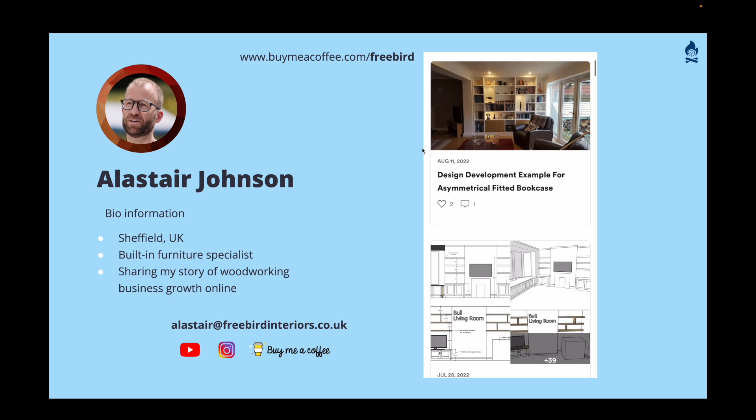The first talk in this series, which was given at Basecamp 2022 in Vancouver, is also available on my YouTube channel. So just search for SketchUp for Cabinet Makers from Concepts to Construction. That video will give you the foundation of understanding about the CabinetSense extension, which we're building on in this session to show the CNC functionality.

To give you some context to the sort of work we do and the environment that we do it in, this is our CNC machine in our workshop. We now have a 2,500 square foot industrial unit. We've moved up from my garage. The CNC machine takes an 8 foot by 4 foot sheet and has 8 tool positions, an 8 tool changer.

What I'm going to show you is very suitable for this sort of machine and any level of machine up from that. It will also be of some interest to you with a more hobby-sized machine, but if you are watching this just considering getting into CNC as a professional, I would very strongly advise that you get a minimum of 8 tool change capacity and a minimum of an 8 foot by 4 foot bed size.

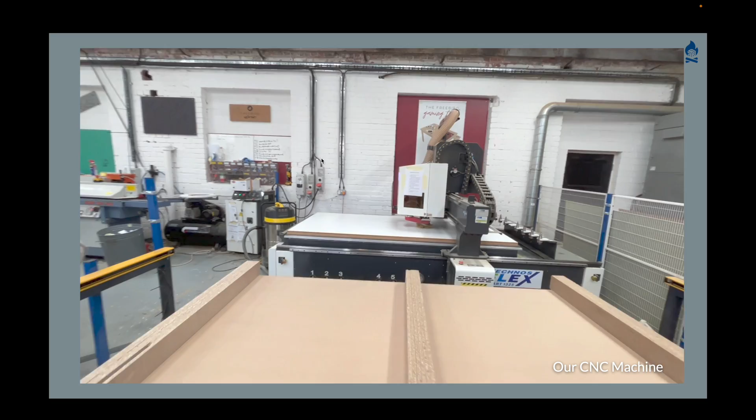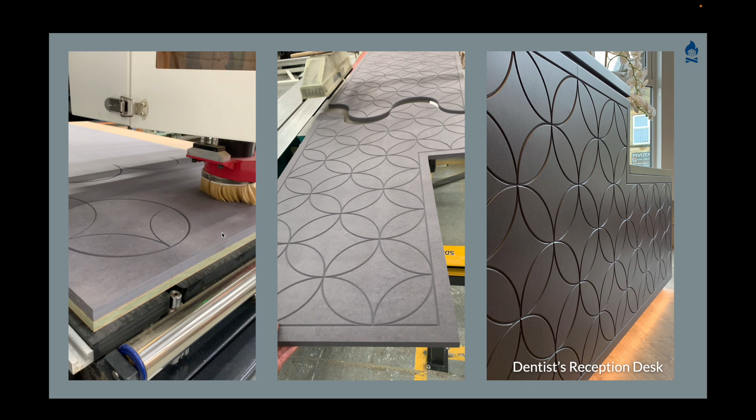Here's an early example of a project we took on after getting the CNC machine. The material here, if you're interested, is a through-coloured MDF. It's the Finsa Fibracolour board. And this particular project was longer than the bed of our CNC machine, but the design allowed us to conceal the joint. And I think this demonstrates very well the possibilities and the precision of CNC manufacturing.

This type of project was planned in SketchUp. The detailing is basically quite unsophisticated, just a series of lines which were toolpathed with a V-cutter. This can be done in SketchUp. Actually, due to curve smoothing issues, I did the final drawing of these curves over in Vectric, which is the other link in the chain of software that we use to get to CNC.

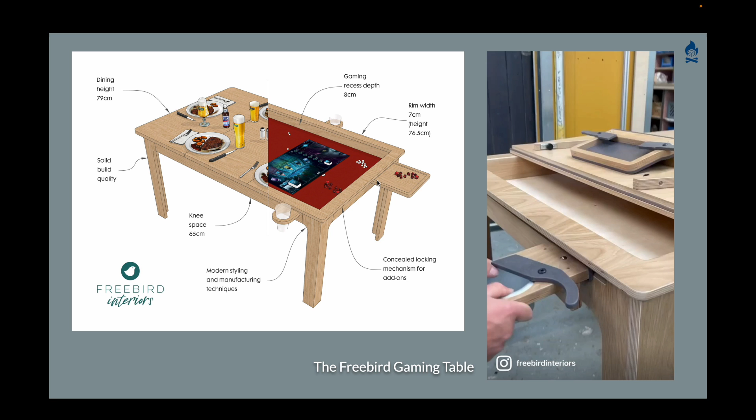Here's a project which was designed entirely in SketchUp, modelled and remodelled after doing prototypes and remakes, checking very, very fine tolerances of these parts and remaking them in SketchUp, and then re-outputting to Vectric. And the way that I produced this 3D model and moved it through to Vectric and CNC is the way that many people are working in SketchUp.

You do your 3D modeling, you actually draw in all your machining and your fixings, then you get that out to Vectric or similar software and apply toolpaths. There is a more efficient way for more standard work, so particularly carcasses, boxes. We can automate this a lot more in the way that I'll be showing you.

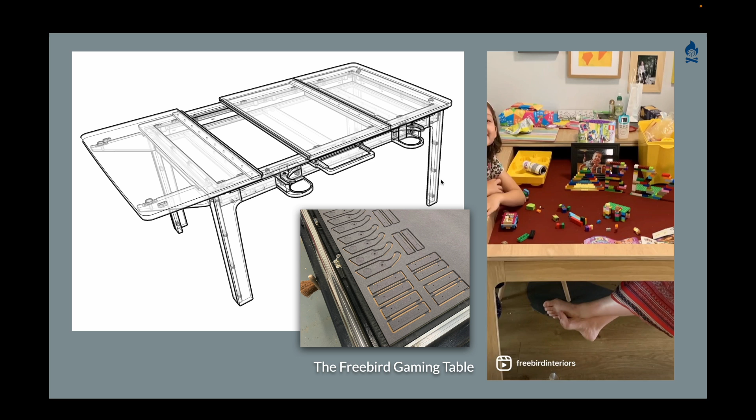Because the reality is that in a built-in furniture business or a kitchen cabinetry business, the bulk of your production is likely to be rectangular parts that need to be cut square and precise. With drilling for shelf pin holes, you need to ideally be churning quite a quantity of these through, know which part is which, and it's not the most inspiring part of your work, so you want it to happen as efficiently as it can. This is really the bedrock of your production.

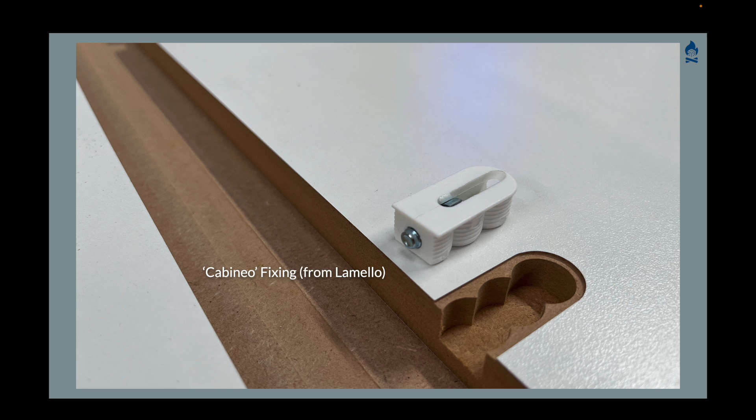And this fixing, the Cabineo from Lamello, is particularly well suited to that because it fits down into the face of the board with a screw that then projects from the edge, but is still very strongly held into the board. And that screw lines up with a 5mm hole in the mating piece, as I'll show you in the next slide.

This shows you a little bit more about how the Cabineo fixing works. Those are your two parts, your 5mm hole. The installer will offer them up. The slight projection of the fixing here will self-locate into the hole before it's pulled nice and tight with this specialised bit. It works a little bit like a pocket hole joint.

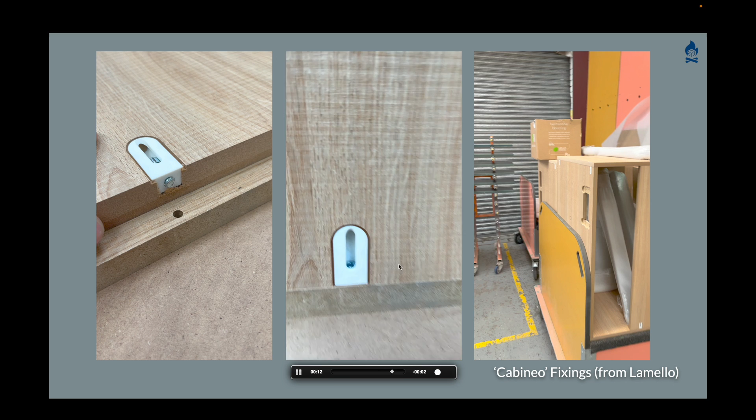So as you can see in these examples of cabinets, we are putting the Cabineos on the outside, out of sight. We're also machining shelf pin holes and hinge holes and cutouts for sockets. Really, as much as we can, we will machine for speed on the CNC machine. So that's a bit of context about what we do, the sort of work that we produce.

For the rest of this presentation, we're going to start with an overview of a specific project in SketchUp and as built, so we can see how we can go from SketchUp to CNC. We'll start by looking then at basic export methods from SketchUp into Vectric for toolpathing and then onto the CNC machine.

I'll then give you an introduction to the CabinetSense extension, and as I said before, there's a bit more detail on that in the previous video, which should be linked below as well. And then we'll look at the CabinetSense export process into Vectric, where you can really supercharge the speed and quantity of information that you're sending through for CNC machining.

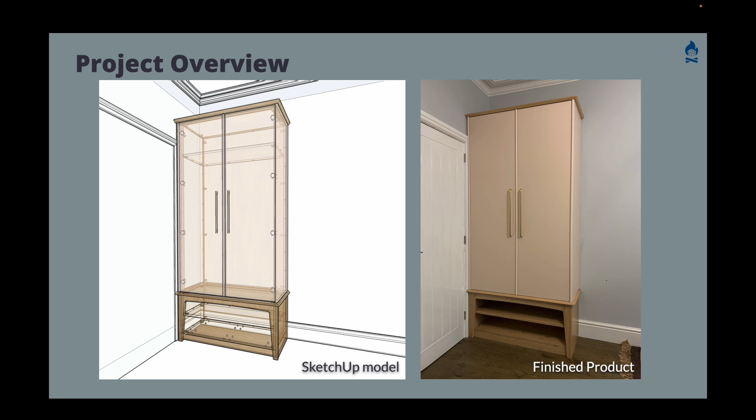Now looking again at the image on the left there, you can see that the machining data, including the hinge cup holes, Cabineo fixings, through screw holes and sockets for adjustable feet, are all there in SketchUp. This data is carried through for CNC machining, but as we'll see, I didn't need to draw any of those circles or cutouts. It was all automated according to rules that have been set up. So let's have a look at the SketchUp model.

So I organise my SketchUp models using a template where I've got preset scenes that allow me to quickly isolate things, and I can add annotations which are unique to scenes.

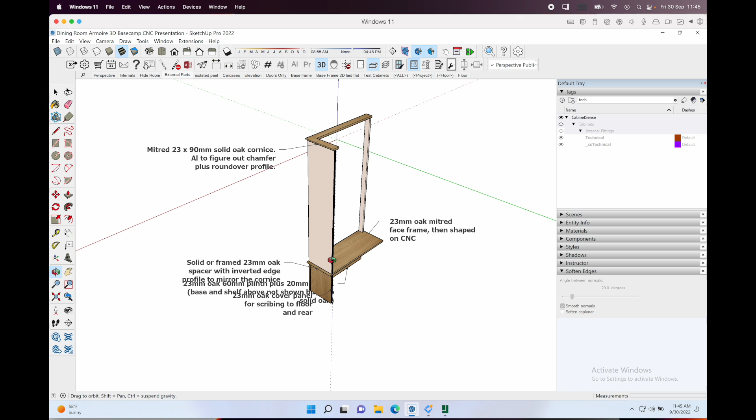There are always some parts on a project that I don't send to CNC because it's quick enough just to instruct my team to measure off the dimensions and go straight to the panel saw. So scribe strips, side cover panels - these don't necessarily have to go to CNC, but they could. Depending on the project, they may be sent through if there are other parts of the same material and thickness that may as well just be cut together.

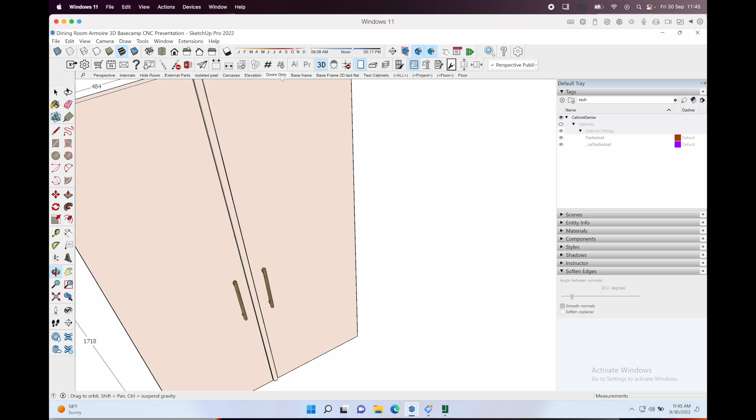Let's have a look first at this shaped base. I've got a scene where I've isolated it, and I want to show you basic methods of export from SketchUp to CNC before we get into the CabinetSense extension.

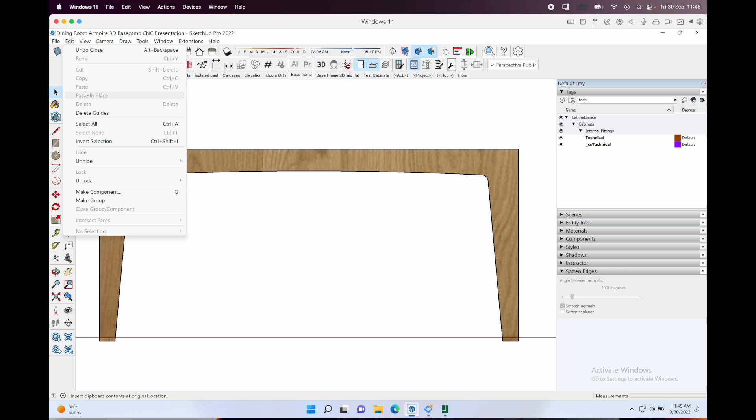You can go right ahead and export, select 2D graphic, and then select DXF. This is a widely compatible CAD drawing format that you can bring straight into Vectric to scale. I've done this already, but I'm just showing the process. So 2D DXF, that's one way of doing it. What you'll get is what you see, and it will come into scale.

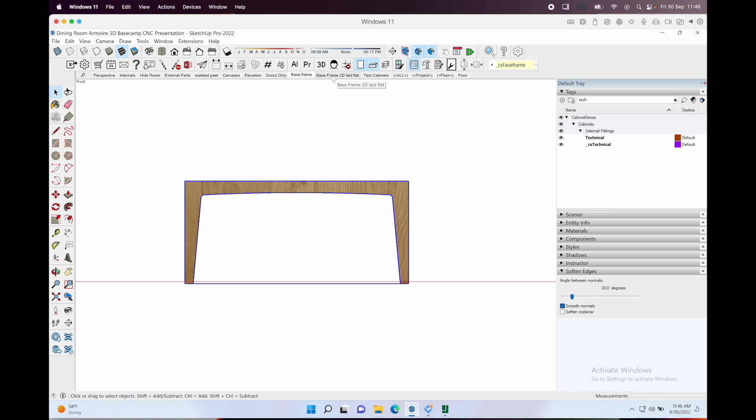Another way of doing it is you can export that part as a 3D DXF, and there are certain benefits to doing that, which we'll see when we come through to Vectric. If you do choose to do that, I found that you need to rotate that part to be laid down flat, so you're looking down on the X and Y axis.

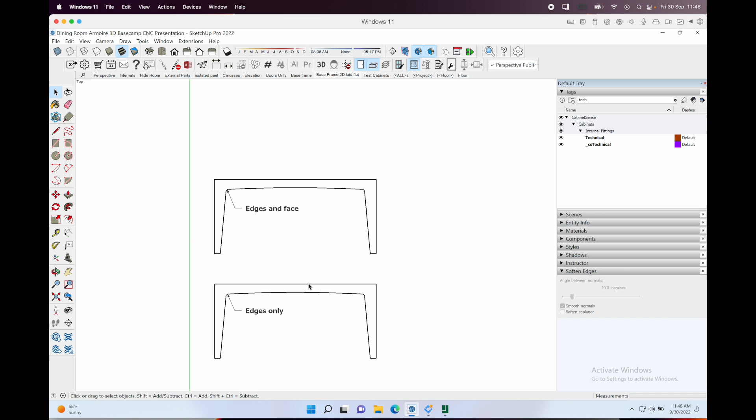So I've done that with this part, and what I've done just to demonstrate something is I've kept a version of it with the face and edges, so you see I can select a face there, and I've got another version of it where I've deleted the face. I've actually converted both of these to just one face without the back edges.

Let's go over to Vectric and explain why I've done that.

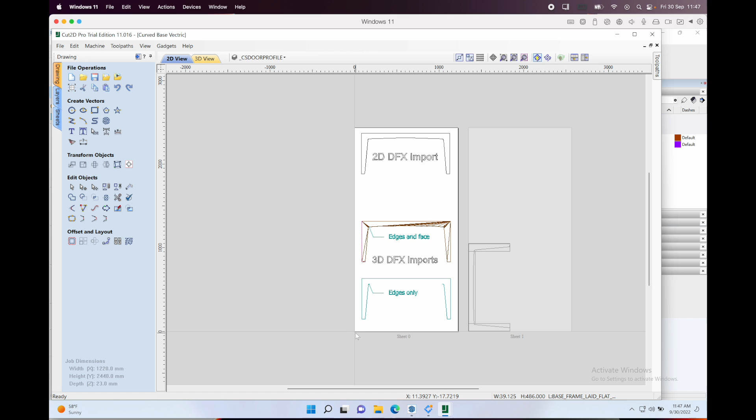So this is Vectric Cut 2D. You can get a free trial of this to give it a go. If you're new to this, what we're working with is a sheet which represents the sheet size that will lay down on the CNC machine. For my machine, the 0 axis is here, x0 and y0. We've already set up the parameters, so the size of the sheet, the thickness, etc.

And we have a lot of tools where we can draw rectangles, etc. directly into Vectric. Over on this side we have the toolpathing, so once we've got geometry drawn or imported, we can start to apply toolpaths, profiles, pockets, drilling, etc.

So I started off by saying that you could bring in a 2D DXF. You'd go to your SketchUp model, you'd go to Export, 2D Graphic, DXF, and then you'd bring it in. The way you'd bring it in would be Import in Vectric here, Import Vectors. You'd find that file. So that came in to scale.

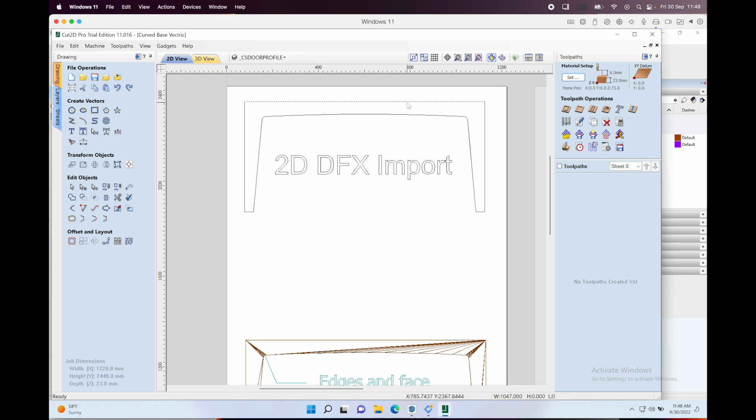But as you probably know with SketchUp, curves are not necessarily true curves. So with that 2D DXF import, you're going to get the faceting of the curve - these are actually straight bits with a little angle that approximate a curve.

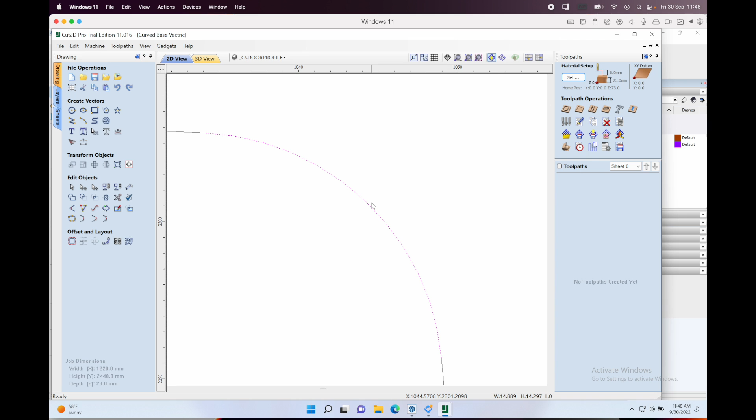The benefit then of bringing in a 3D DXF, for reasons that I don't fully understand, but there's a quirk of the 3D DXF export process where it can identify an arc or a circle created in SketchUp, and it will export it as a true curve, in a way that the 2D DXF export process doesn't seem able to do.

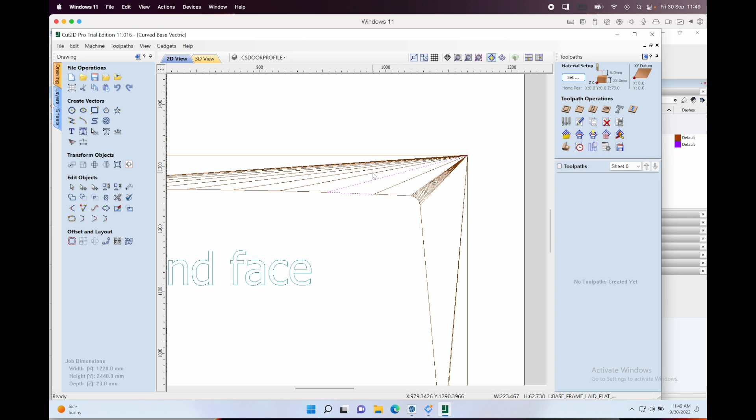However, what we're seeing here is highlighted and dotty. There is the true curve, which it's reinterpreted back to an arc. But we're also seeing the facets, which are the surface. You'll find that when there is a surface or a face in SketchUp on a 3D import, it often is shown with these various connecting lines sat on the face.

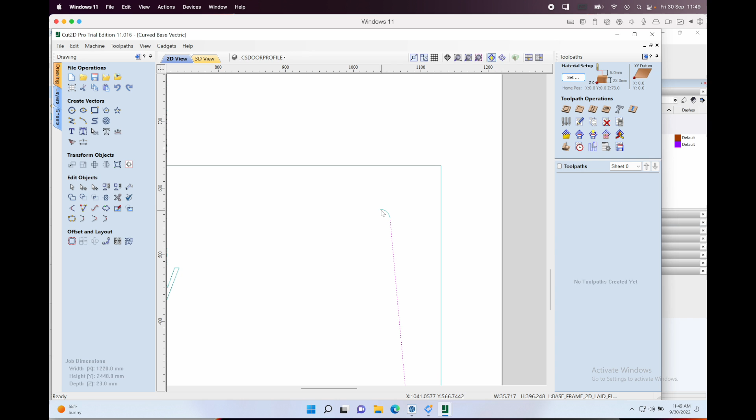So that's the reason why I experimented with stripping back that bit of geometry to just its edges, no faces. But for some reason in the process of doing that, the arc here didn't come through.

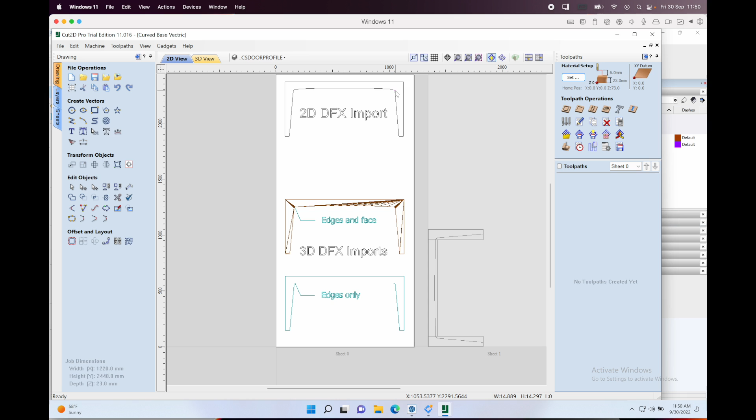So really the purpose of what I'm showing here is that there are certain quirks and limitations to that basic DXF export and import process. It's a bit limiting really for you to have to delete faces or get rid of these kind of lines as they come in. It's also limiting sometimes to have the facets when you want a smooth curve. And note here as well that parts are broken apart, which might affect the ease of toolpathing later.

The other way of going from SketchUp to Vectric is to save your model in SketchUp as the 2019 version. This is because Vectric has an import facility, but it currently only works with the 2019 version of SketchUp, so whatever version you're using, you'll need to save it as that type.

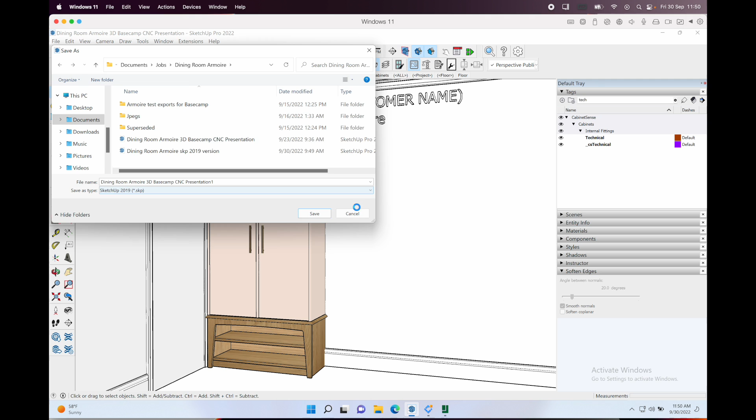Once that's saved, you can come into Vectric and do an import process, selecting the SketchUp model itself. Here's our 2019 version, and a dialog box will come up asking how you want to interpret those 3D groups and components within your SketchUp model, since Vectric needs to decide which face you intend to machine.

Do you want to smooth polygons into arcs, which is a benefit of this Vectric process? Do you want to only import data from certain layers? So you can play around with these settings.

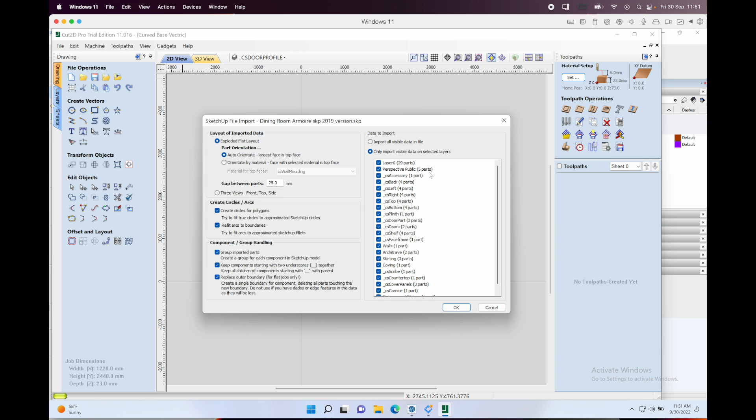Now I've already imported just to save time, so what you'll end up with is it dumping in a bunch of parts with just a rudimentary nesting, laying them along an axis with a certain gap in between. They'll come in according to the layer they're on in SketchUp, so the layers carry through here.

You can set that up to work for you. It will bring in shaped parts like this and have a pretty good go at smoothing those curves, and note that it brings it in as a continuous boundary. You can then nest these and move them around. It's a very useful feature.

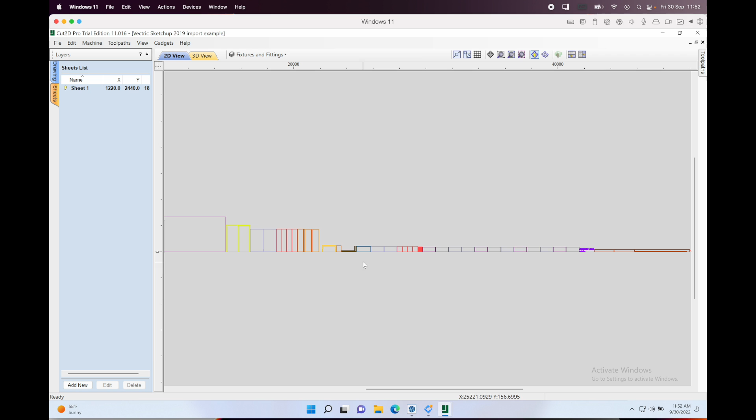However, your parts aren't labelled, so you've got to figure out what's what. Here we've brought in parts of the room, the coving in the room, door frames, text. You can discipline your model so you only bring in the layers you need, but there are still limitations to this process.

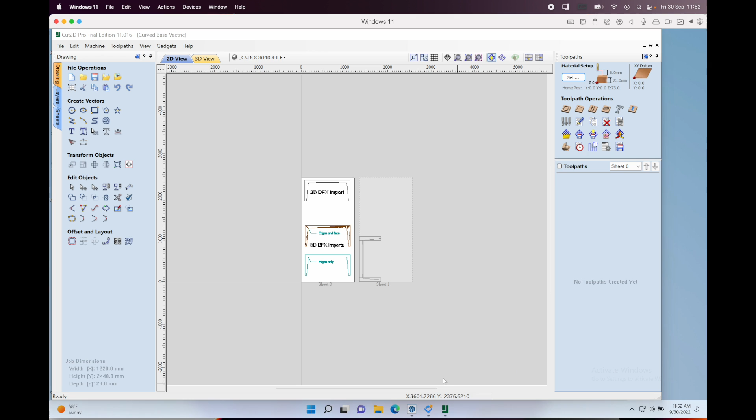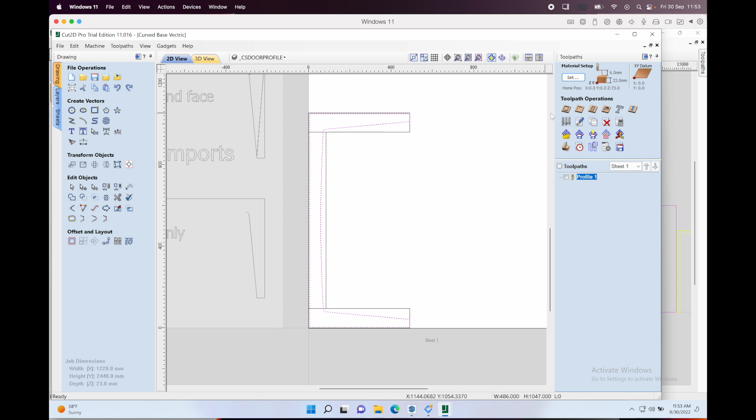Still, let's just assume we've brought our shaped part in by one of those processes just explained. Let's have a little look at how we might machine that. What I did for this part was, within Vectric, I added rectangles oversized versus my finished shape, zeroed down to the zero of my CNC machine, then placed my imported shape on top of it, selected it and toolpathed it with a profile toolpath.

I set my depth plus my standard overcut into the spoil board and selected my cutter, which was a 12mm cutter. In Vectric you can then visualize the machining result you're going to get, just as a little double check that you're cutting right through, and so on. Then you have your toolpath selected and you save your toolpath.

So when you do this, what you'll be saving, if you're using the full version, is Gcode. Gcode is what runs the CNC machine. So let's have a look at how that worked out in real life.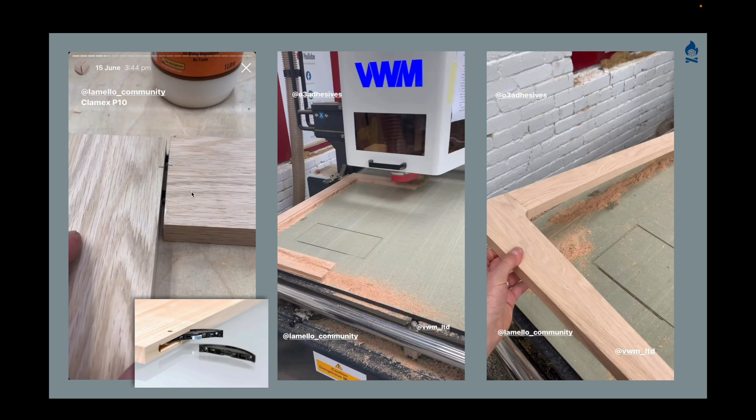What I did was take the sizes I decided on in Vectric for my oak parts, which were just cut using a panel saw and chop saw. I joined them for speed with the Lamello Clamex fitting, which self-clamps, because I wanted to be able to go straight to the CNC.

I secured the workpiece to the base of the CNC with centering pins down at the bottom left, using masking tape on the reverse of the workpiece, masking tape also stuck down on the base of the machine, and super glue in between, which is a good method when your vacuum beds won't hold a thin piece like this. This was the result after I'd taken off the masking tape and cleaned up a little bit.

So that's a great example of what CNC is good for, quickly creating shapes. If you can draw it, you can shape it.

Before we move on to the carcass work, if you're fairly new to CNC, bear in mind that CNC is not the solution for every shaping operation. It can be tempting to try and make it do everything. It won't get rid of the hands finishing aspects you need to do. It won't be the right tool for certain processes like edge shaping. It may be worth investing the time in making it work for a process like that if you're going to do a lot of it.

But very often, for example, the cutting of these joints here, we don't do this in this arrangement often enough for me to have set it all up in an automated way in the CNC machine. It was quickest to go straight in with a handheld Lamello Zeta P2 machine and get those joints done.

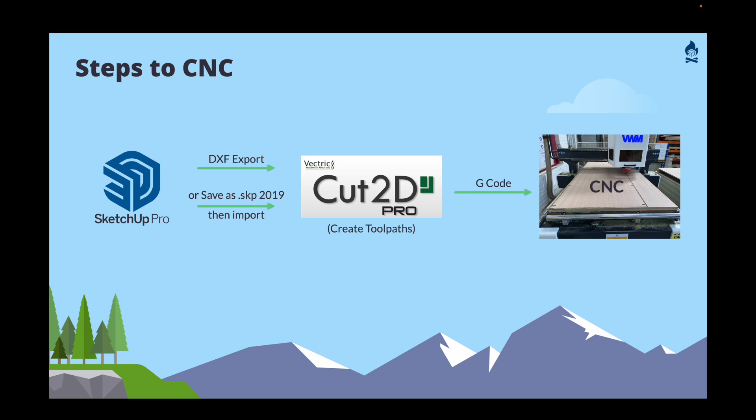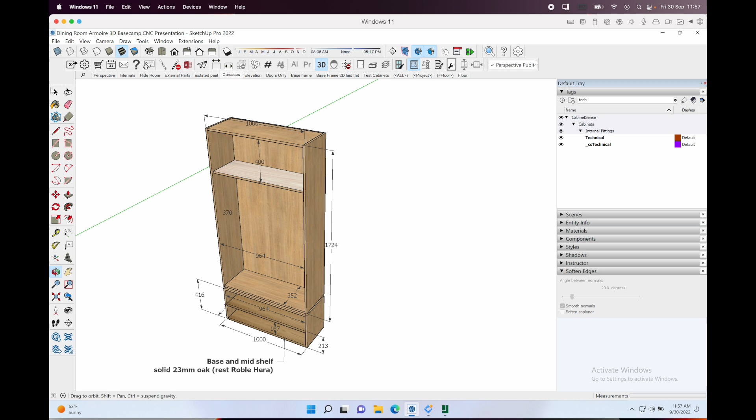So let's look at another faster way of exporting our SketchUp geometry to CNC using the CabinetSense extension. Go back to our original SketchUp model. Now if we just isolate our carcasses here, I'm going to do an X-ray view.

Each part here in this CabinetSense carcass has a lot of options that you can control. Now I get to this window using the CabinetSense toolbar, the CabinetSense's own components option button here. Now this part can have its material independently changed. Let's just change it back to the oak effect melamine. It can have settings like its positioning changed.

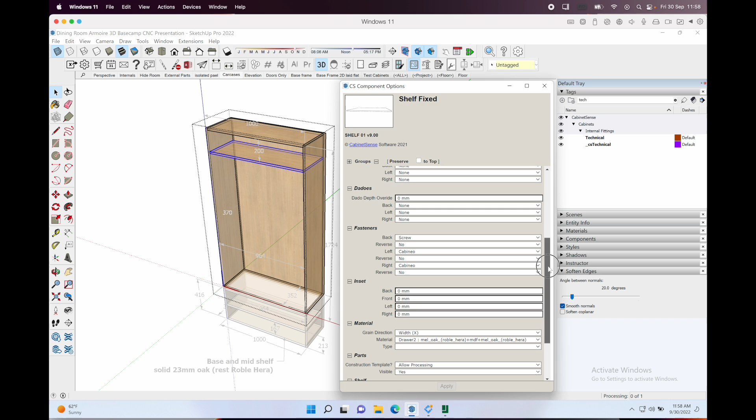I can choose to set the front in. And a range of other settings, including how I want it to be fastened to the adjoining parts. So I can specify that at the left I want a certain type of fastening, at the right a different one, at the back another. So wherever it meets a part, it's looking for an instruction about how it's joined.

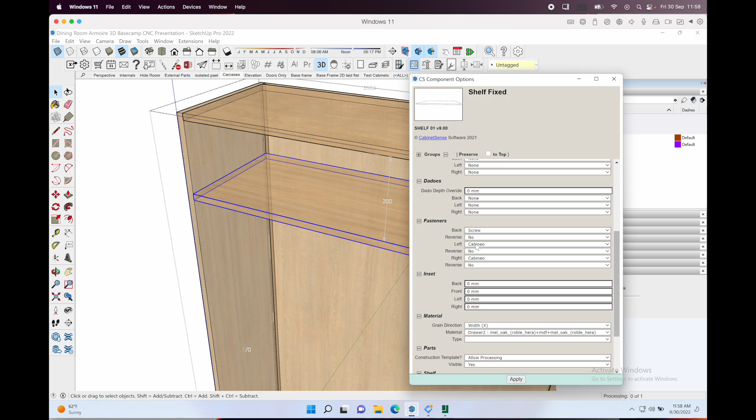So having chosen these, which have been pre-set up in the background in a machining database, I can go out, select my whole cabinet, and then just do a little visualization process, so preview machining drill points. And that's going to show me the machining that's going to be exported in DXF for machining in Vectric. So I can just get a little visual check here that yes, that looks correct.

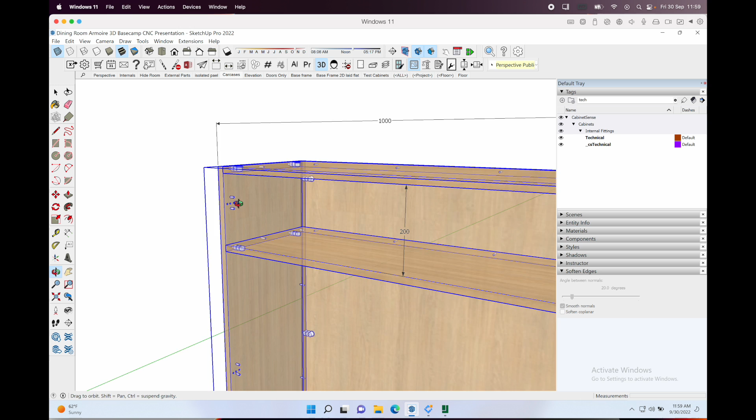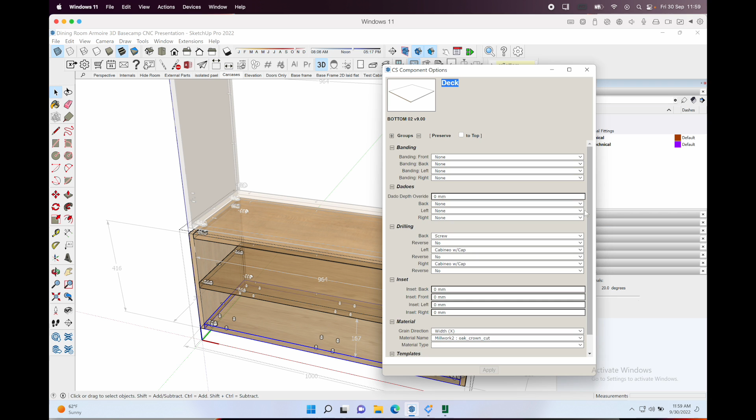The Cabineo is on the underside of the shelf. There's a through hole for a self-tapping screw. We've got my particular machining setup for hinge mounting plates as well. And then down here on the base cabinet, if I just preview that one, again with the machining preview up here, we've even got our socket holes to receive adjustable feet, because that particular part has been set up with that instruction. So our machining template has this type of foot.

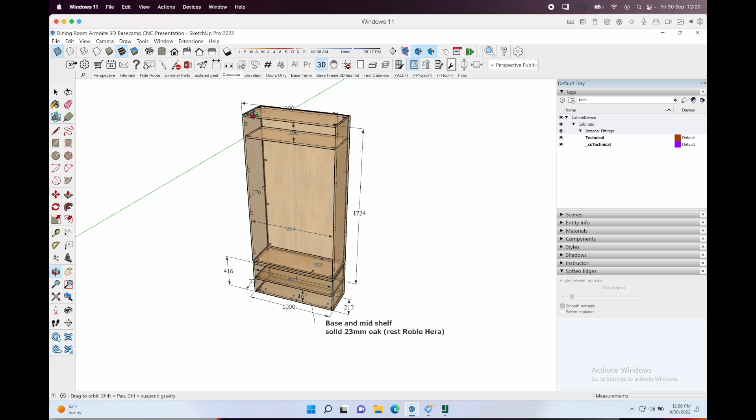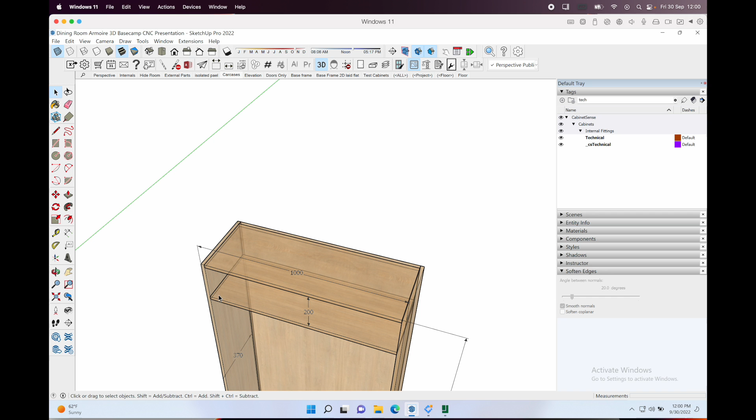Well, how exactly are we going to model that, and how is that going to be picked up in Vectric? Because if I do try to model a recess exactly how I want it to be, then when I export it I may find I get doubled lines and other issues, or overlapping circles which are then no longer identified as a drilling point for my 15mm drill. So it's really much better to not have to draw your machining in.

So the way that it's generated is via a machining database. So CabinetSense comes linked with a Microsoft Access database that it refers to. If we click on the toolbar here, we will open that up.

And this did take me a long time to get my head round, so I'm certainly not going to expect to fully explain it. But let's just give you an overview. If we go to our fastening methods here, I can set up methods, for example, Cabineo, just my 3 overlapping 15mm holes, which is applied under certain conditions. You have Cabineo plus this template, then we're also going to add some foot drilling holes.

If you have a Cabineo for a part that is under this length, then we're going to have a certain set of spacings and different spacings at this length and so on. So as we look over here, what we're instructing is, if this is the conditions we're working with, then we want to have a Cabineo fastener 37mm from the front edge and 57mm from the back edge. And over here I've specified that I want to alternate with a screw fitting,

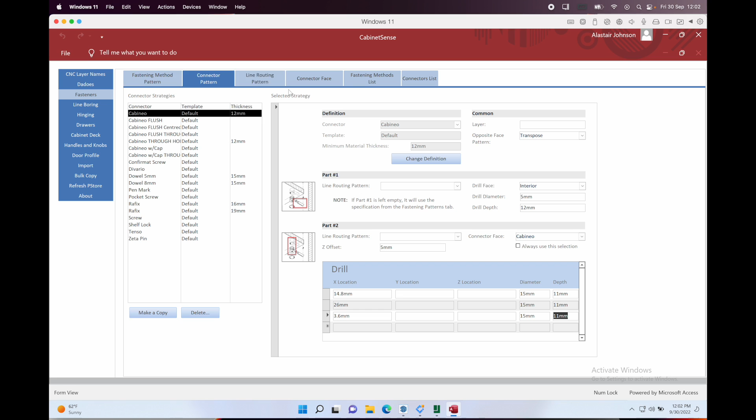that's just a through hole in between the two Cabineos. If we drill down to a deeper level, we've got the actual setting of the Cabineo itself. So we have hole centers here off the edge of the shelf end, or the part end, whichever part it's applied to, the diameter of the hole, and the depth that hole should be drilled at. So these 3 line items here are specifying those 3 overlapping holes. And then simply by choosing Cabineo here, we can choose how that pattern is mapped at the start, end, or center, or a repeating pattern along a connection.

We also set up here the available tools, so that CabinetSense knows what tools we've got loaded in our CNC machine, and then can output the data to suit the tools available. So just before we look at that export process, what we're saying is with CabinetSense, we no longer need to use these basic, slightly error-prone export methods, which leave us with parts in Vectric which we're not quite sure what they are because they're not labelled.

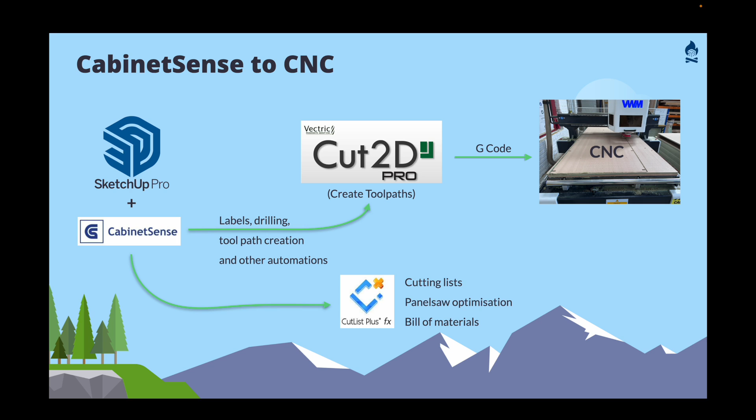We can use the CabinetSense extension in SketchUp, and then we have a direct export process to Vectric, which can include labels, the drilling information we've just described. We can automate the creation of the toolpaths onto that geometry and other automations that are taken care of. You can also use CabinetSense to output your parts to a simple cutting list or nested cutting diagrams for use on the panel saw, and that was demonstrated in the previous presentation.

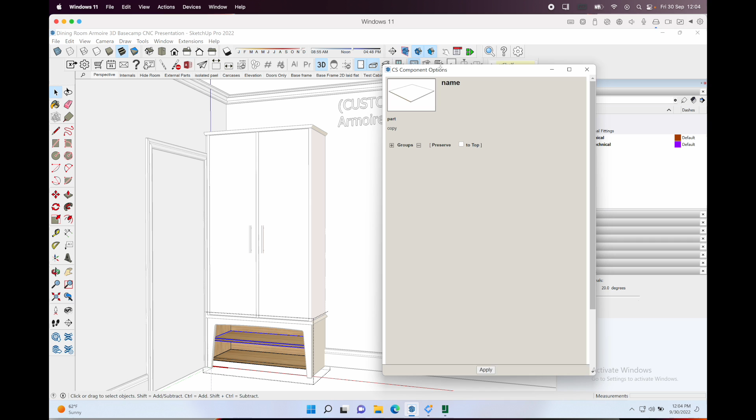So how do we export from CabinetSense? Well, once you've got everything set up and that machining data is applied to each part as it should be, you can just double check per part. See, we've got fasteners applied here. Of course, we can double check with our X-ray view and the preview machining as we looked at. You don't need the preview machining to be on when you do your export, and it doesn't matter really which view you're in. You don't need to isolate only your CabinetSense parts, because it knows that, for example, the walls that I've just drawn natively in SketchUp, they're not CabinetSense components.

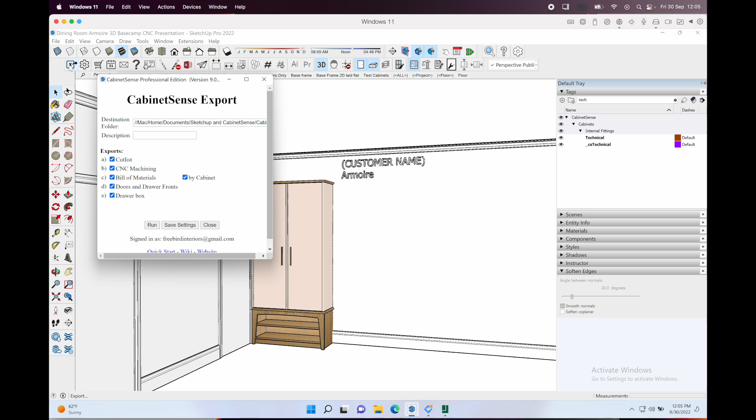So all I have to do is hit export up here. I usually leave all these settings on because they don't take up much space, and I can go and just pick and choose what I want later. This creates a bunch of files that just get dumped into a specified folder, and it gives me a little report that it didn't find any errors, and another report screen here showing the tools that it's going to use for the required machining based on what I told it about my available tools on my CNC machine.

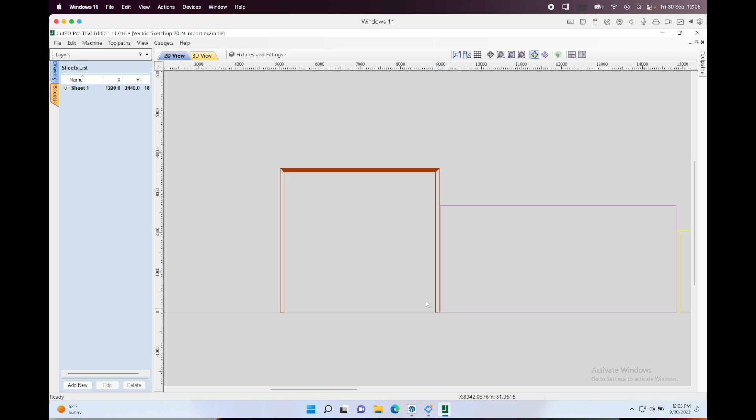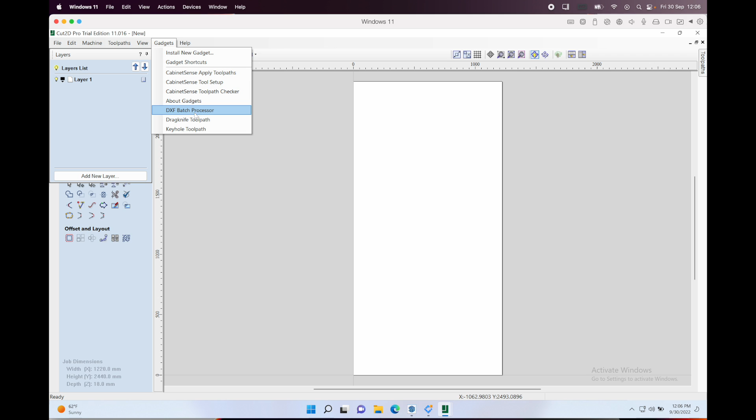So now that that's done, we can go over to Vectric. We'll start a new file, new project. Let's say we just want to bring in the 18mm thick oak effect melamine to start with for the internals. That's set up okay there. And what we'll do is we'll use a Vectric gadget, which is a DXF batch processor. So rather than one by one importing DXFs, we can just find a folder full of them and pull them in.

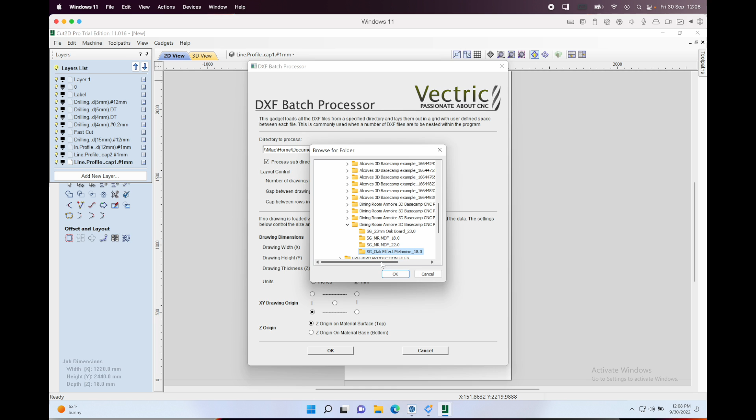So this is where all my project exports land. Yeah, so here we go, there's the folder. These are the parts for the so-called armoire. So we've got our big back panel, our small sides down below, and in this particular project I just labelled the lower short cabinet as A.

So that comes out before the part's name, and the upper cabinet I labelled as B, so we can see there's the big back panel, starts off as B and then the back. But the naming conventions for the internal parts are already pre-set up within the CabinetSense components.

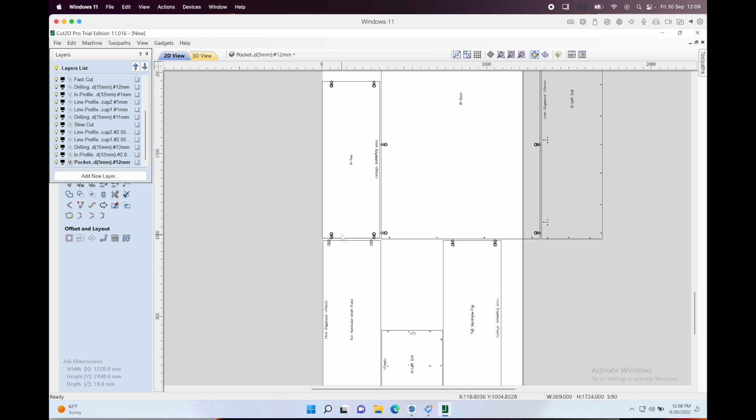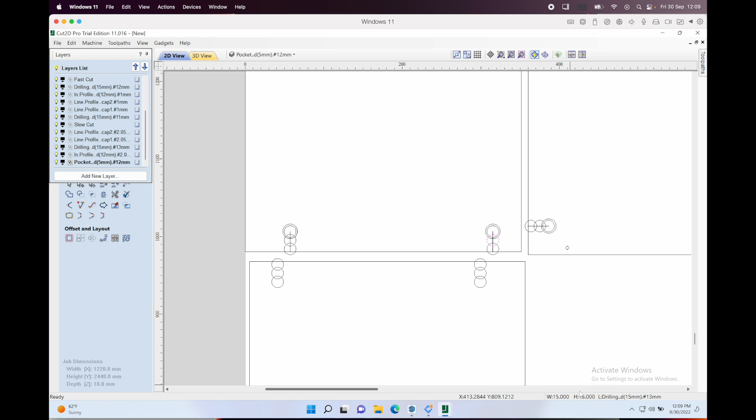The machining information has been generated, so these are perfect circles which are only really brought into existence at the export process. The visualization of these that you saw within CabinetSense was just a visual reference, but the true output is a perfect circle. And these have landed on a unique layer according to the machining that needs to be done. So what that then means is that we can very quickly machine this or set up the toolpathing for this via a toolpath template.

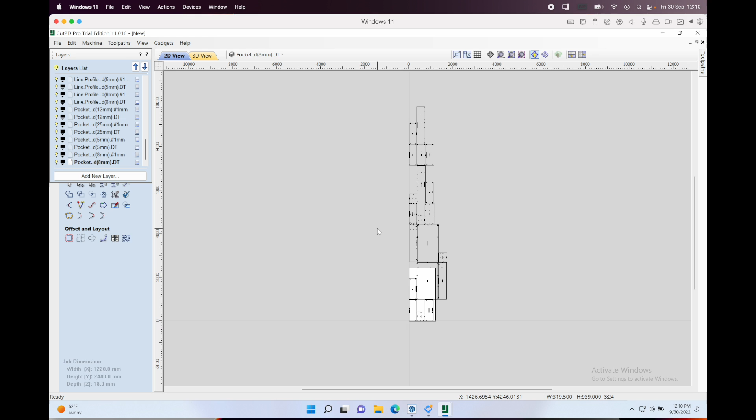Now of course we need to nest them properly onto the sheet, but just to quickly show you the process for applying the toolpathing, we'd go to Gadgets, and we'd use a CabinetSense gadget that can be loaded into Vectric. And what this will do is, if we bring in a preset sheet strategy, so this is a Vectric file with a lot of preset tool information, bring that in, tell it to apply, and it's going to do some clever work in the background where it's going to go looking for layers and taking from those layer names the depth information and automatically generating then toolpaths accordingly.

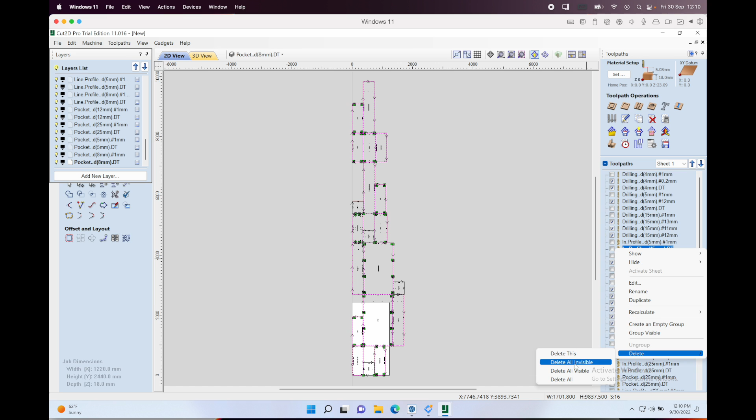That process does generate some redundant toolpaths because all the available toolpaths may not be required in this particular project. So we can just do a little delete. And here are the toolpaths. And we can see how it's been visualized with the direction of the tool cutting. We can change how it's visualized up here where we get a colored infill.

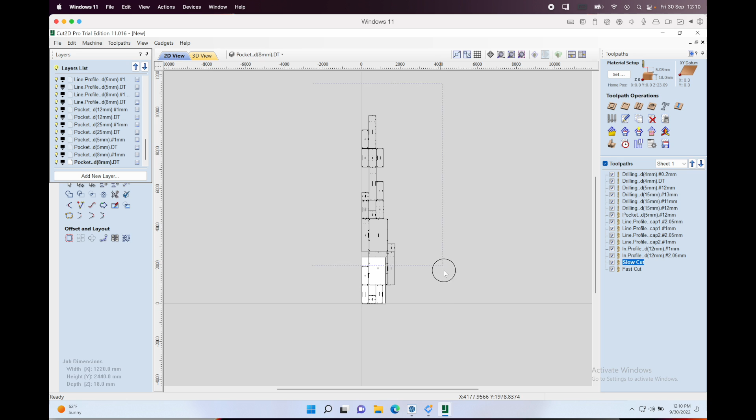And in fact what we have to do then of course is nest these, so there's a certain back and forth between the nesting process and the application of the tools, which I can't fully go into here, but within Vectric we have our own nesting options and we can get those parts onto sheets as they should be, remap the toolpaths, and then we're ready to go to G-code.

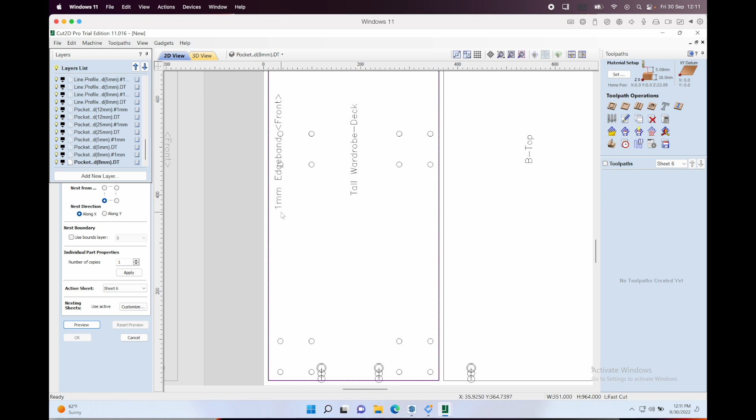So you can see the power of this. We know which part, we know what's the top of each part, we know what's the front, we even know when a part has a requirement for edge banding, because that's been set up in CabinetSense at the part level. And because our edge bander doesn't have pre-milling, we tell CabinetSense that whenever we've applied an edge band to a part, we want it to be sent to the DXF with the edge band thickness removed. So this part has been automatically reduced in its width by 1 millimeter, because we know that when we take it to the edge bander, that width is going to be added back on. So all of that is taken care of.

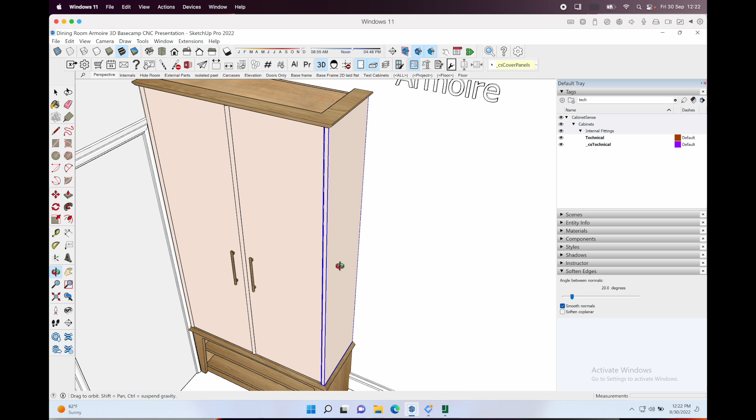Let me show you one more thing which helps to explain the unique strengths of SketchUp in this area. Now this part, which is a side panel that I could send for cutting on the panel saw, it is a CabinetSense component, although it doesn't fit within a cabinet. And if I just isolate it, as I've already done in a scene here, we can see that I've already been able to apply a profile onto the front edge.

So although it does have parametric capabilities, it is still at that lower level of components. It is still SketchUp geometry, which we can mess around with the way we're used to. And it hasn't broken the parametric functionality for me to have just rounded over that front edge. So let's take that a little bit further. I can go to an arc here.

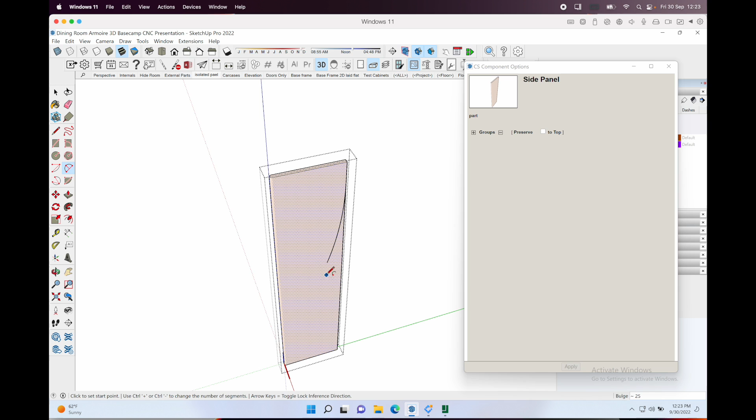So let's just imagine that we want to shape the back edge somehow like this, just using native SketchUp tools. I can punch that through using push-pull, so I've just tapped P for push-pull. I am just going to take off a little scribe instruction that's on the back that might mess with that.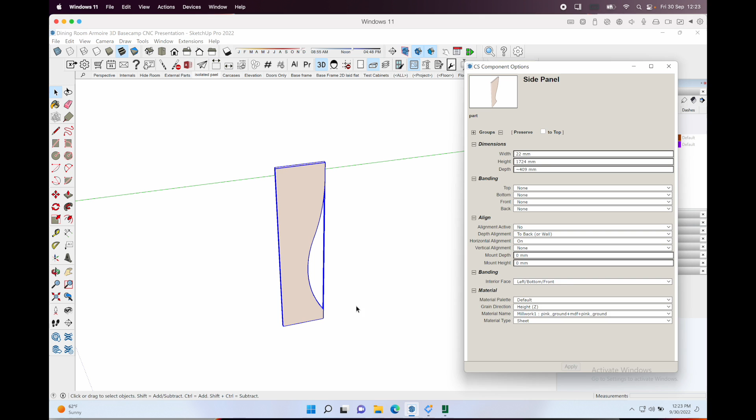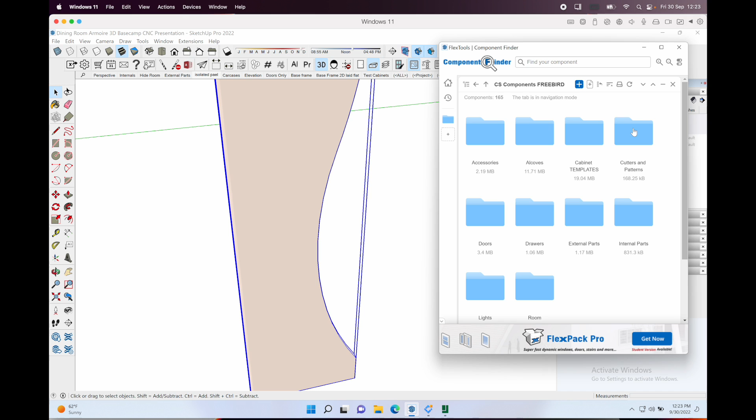And then one more thing to show you so that we can see how it carries through to Vectric is if I wanted to punch a hole through that, then I could just do what I've done, draw a circle, punch through, but I could also use a CabinetSense tool, which is a cutter, and we can just pop that onto the surface, except we do need to drop down within it like this.

So generally you need to open up a cutter, drop it onto a surface, and that will stick to a surface of a part. And that component there can be set up to be a given diameter, so I could change that. And you can set it up to cut a certain depth, like this is a recess.

I could just go right through, in which case I'd just put a big number. That's how it works. Put a big number in, you know it goes through. It's not going to keep cutting through, it just goes to the depth of the part. But let's keep it at 9 millimeters.

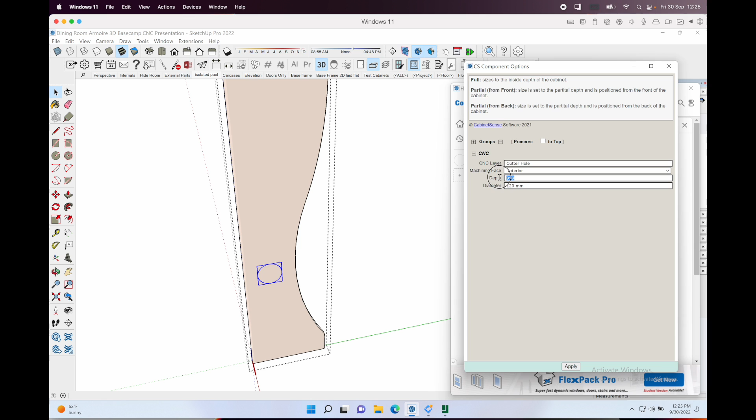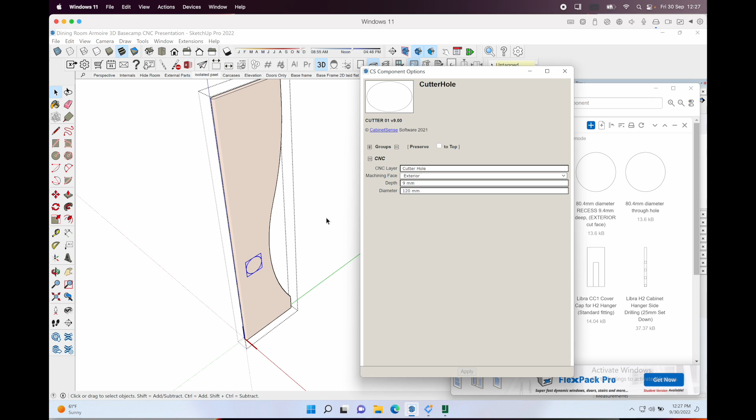One thing I do just need to do with this cutter component is let it know which face I want to machine from. So even though I've dropped it on the outer or exterior face of that part, I could choose to say I want it to machine from the interior. So go to exterior, apply, and then CabinetSense will take care of showing me this part on this face ready to machine into here.

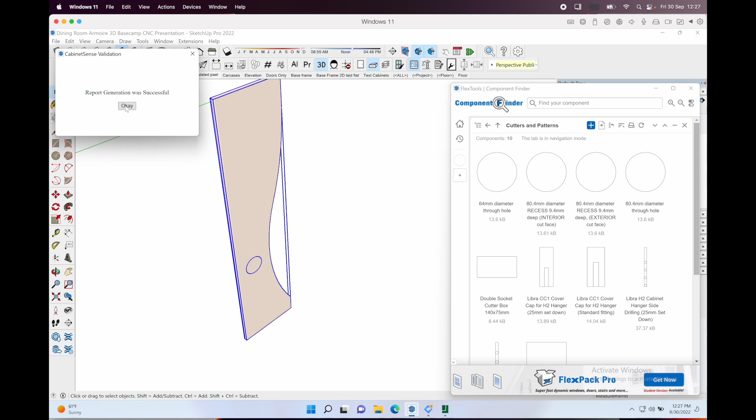So I can just select that part, export, run. Yes, I only want to export that part I've selected. So generation seems to be okay. Come back to Vectric, and we could do our gadgets DXF batch process like we did before, but because it is only one DXF we're going to bring in, we can just go to import vectors.

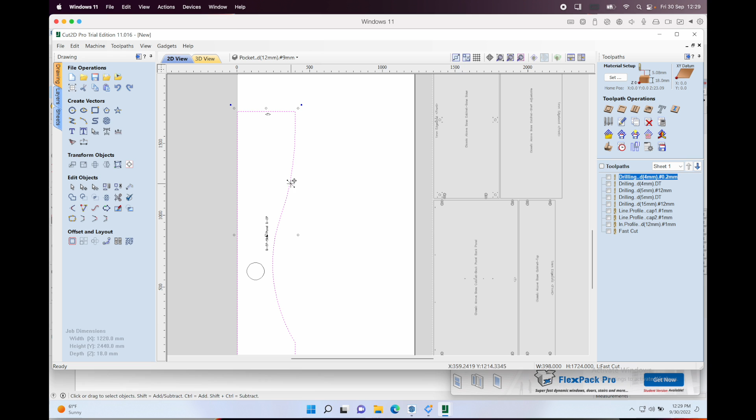So here's where I dump my exports. This is the most recent export. That's a good little check that it's landed in a folder of the correct material, and here is the part. So there it is, it comes in, and we get our nice continuous outline taken care of by CabinetSense. Our part is correctly labelled according to whatever I've called it.

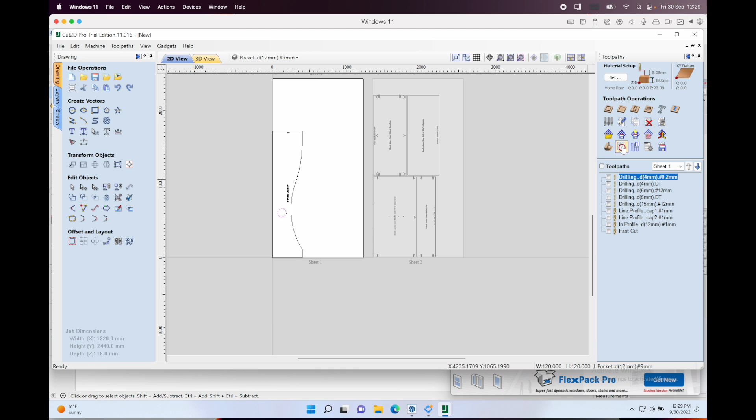Here is our pocket, so that's come through on a layer that you can see down the bottom here. Pocket, it's choosing to use a 12mm cutter. It knows it needs to be 9mm deep. That'll get matched up to a toolpath with our automatic toolpathing process. And we've also got a little indicator that that's the top of the part. So that's a starting overview of how the process works.

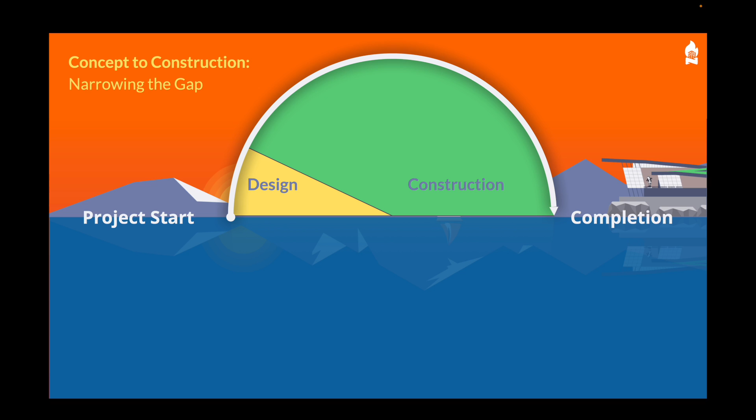Now the principles to keep in mind here are, if you're a small setup, just a one-person woodworking shop, this level of automation may not make sense for you yet. You may be quite happy designing and then making, and then perhaps taking a step forward from all the brain work happening in the making. You might start to move forward to a bit more of an involved design process, which hopefully then reduces your making time, especially if you do move to CNC.

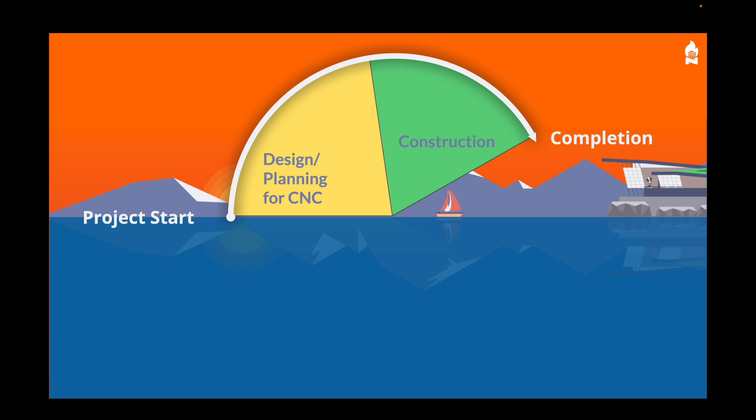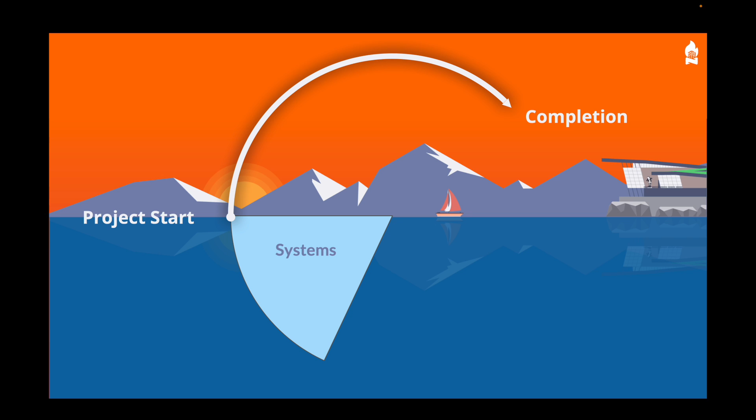You'll have a lot of preparatory work, which will then reduce the construction time and hopefully reduce the time taken to produce the whole project. But what we're really moving towards here for businesses that want to fully embrace CNC and speed up their production is the creation of systems below the waterline there, before the project start date. If you have systems in place, then your design process can be rapidly sped up. Your construction process also with the CNC should be reduced, and your whole completion time should be reduced.

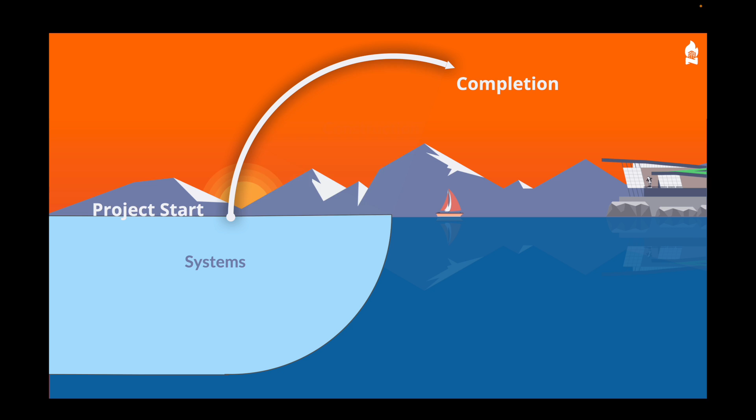Be aware though that the reality is the systems creation process can take a very long time. That was our experience. The power that's available in the CabinetSense plugin is an asset to you, but also something that takes a long time to figure out. There are many different ways of achieving the same thing, many different levels in the software at which you can specify a certain setting on a part. You can program it globally, or you can program it in at the part level. So be prepared for a learning curve, but when you get to this point, which we've now got to, each project then can flow through very efficiently.